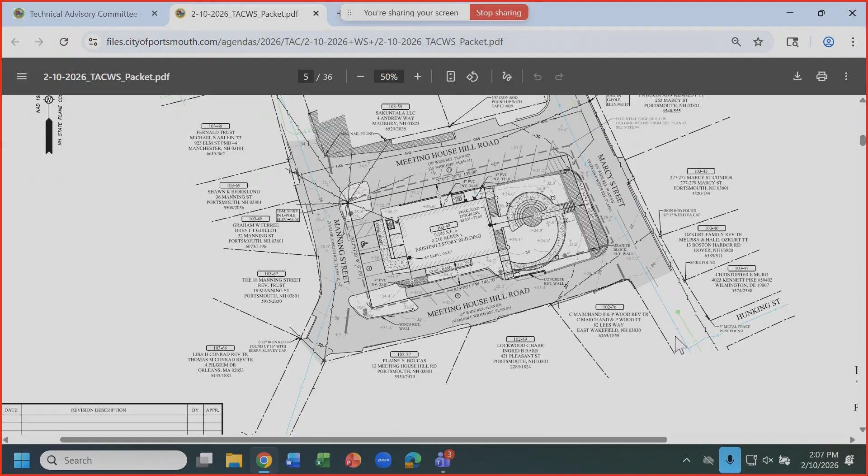So you can go to the site plan now. We are proposing really very little site modification to it. The front part of the parcel is gonna stay essentially the same. There's some settling that's gone on in that spiral area and the handrail and so forth that we're gonna need to do some repairs in those areas.

But it's gonna essentially look the same as it is. On the back side, there's an existing large concrete ramp, and the handicap parking is on, I'll call it, the north side of the site. What we're proposing to do is swap that to the south side and create a new ramp walkway along the south side of the building so that you could enter in the front as an accessible route. On the plan that I have there, I have it going up to a midpoint where there's an existing door, and then going back down and then up to the front entrance.

And that was our initial thought. Tracy, who will speak later, has decided to eliminate that southerly door, that southerly entrance. So it's just gonna be a ramp all the way along the south side and then up into the front of the building, so they'll be accessible to the main entrance going into the site.

South of that, there's gonna be a couple rebuilding the steps and access down to Meeting House Hill Road. On the north side, there's a little piece of walkway that we want to replace that just deteriorated.

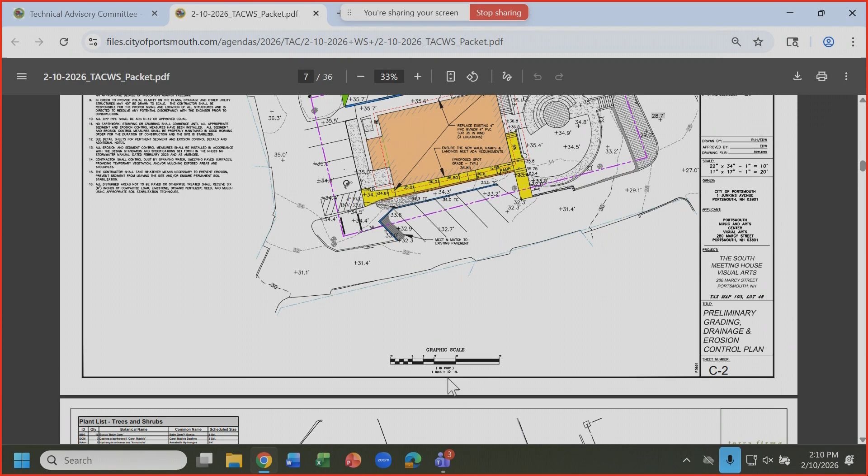There's going to be a new retaining wall along that walkway adjacent to the building on the south side. From a landscape standpoint, there's my grading plan that just shows spot grades on how we have to grade that ramp area. Primarily, that's the only changes to the grading and the expansion of the parking.

And go to the last, is Terra Firma's landscape plan. So he has shown the bike racks, some supplemental parking, landscaping adjacent to the bike racks because on the south of the bike racks is a retaining wall, and so we want to create a landscape buffer as fall protection adjacent to the bike rack.

In front, he's gonna do some parking enhancement, and I am stuck on parking. Landscape enhancements, and then in the front, on the southeast corner, it's a fairly steep area, and the goal is to eliminate some of the lawn in that area and create it more of a natural vegetated area. And I think that's about it. We're looking for your guidance, input, and assistance on what our next steps will be.

Oh, and Tracy, sorry. Sure.

We are looking at the front entrance. There's a wooden deck that connects the spiral to the front door. Part of it has a little bit of a ramp. We'd like to level that out to make it handicapped accessible.

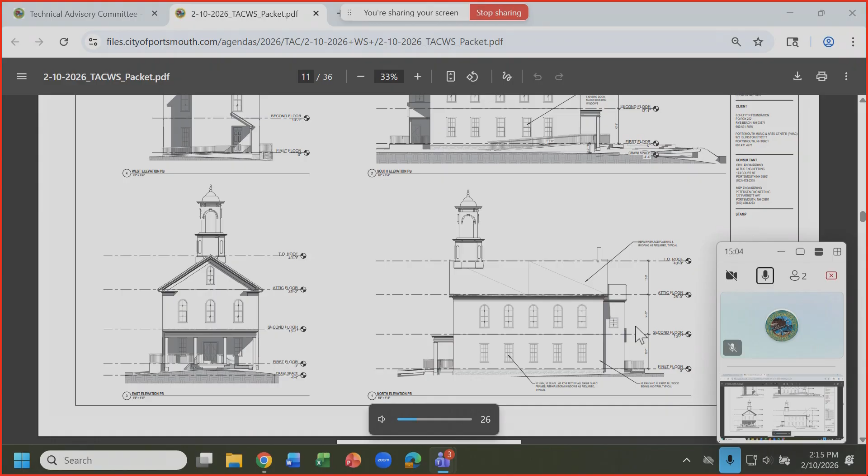Other than that, there are no changes to the exterior, other than a lot of extensive maintenance - repairing all the rotted wood and trim, repainting. The building envelope will be weather sealed. We will repair and reglaze windows as needed. Add more insulation in the attic where it's missing.

We're looking to put utility rooms in the basement, and there may be a little bit of limited excavation required. Adding an elevator to make it handicapped accessible. Fire protection is already there, but that would be updated for the new layout.

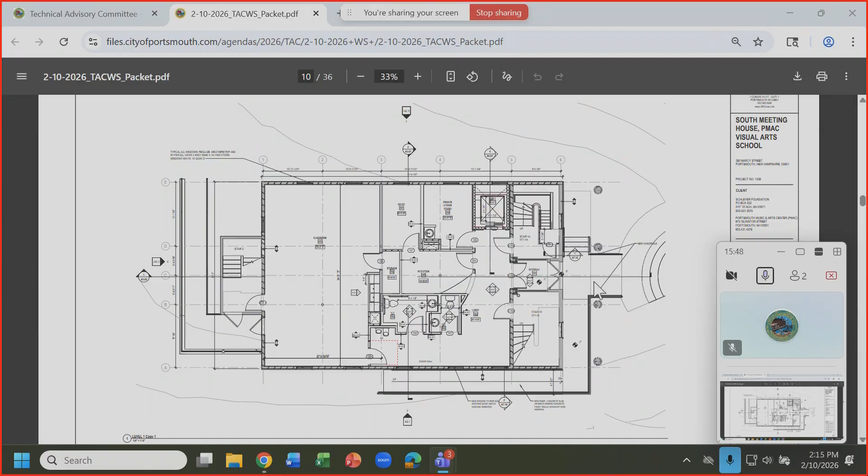What takes place on the second floor? Two classrooms and a small gallery. You don't show that on here though, right? There's no second floor shown - I didn't include the second floor for the TAC work session. You said it is sprinklered, the whole building? Yes. Hold it, you just mentioned an elevator.

How are you going to power that? There's overhead power coming to the site. There are secondaries up there, no big three-phase primary that you would need for an elevator. Peterson is getting on board to be working on this. It is a Lula lift, not a full elevator, so that will help a little bit.

We don't want to bring three-phase power through the south end, that would not be good. No, it's a Lula, it'll be 240, 30 amp, 240.

We're presuming that the pads will need to be replaced, and condenser and so forth as well. Yeah, it's just limited power up there.

The door is just being removed, and the windows basically matching the windows that are there - that's our hope, if you can find them.

There's limited space for putting snow around that building, so you just want to keep that in mind when you're developing your landscape, so that your landscape doesn't get destroyed - crushable, yeah.

I'm not sure I totally agree with creating that green space on the plan to the north there. Seems like a lot, especially considering how tiny those parking spaces are. They're going to be very hard to get into, but for compact car parking, where I did this, I'm fine if we just restripe it.

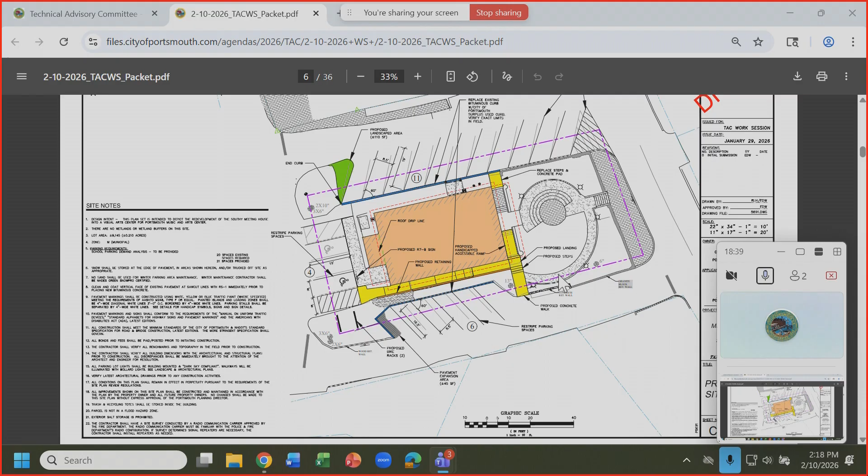So I have no issue, and that's why we're here, to leave those spaces in the same length, same configuration, restripe it. I would still want to add the space on the south side. It makes my life easier to take proposed parking off and just show existing restripe as shown. That site is very, very, very tiny.

There's no room for anything.

Eric, do you have thoughts? Yeah, I was wondering if you can show the width of the street behind the parking spaces. That would be helpful to know, because that is a two-way street there, but what is the width between the end of the parking space and the other side?

Likewise on the north side as well. We've had issues with parking out there where they're backing out of those last spots onto Marcy Street. It's really a blind corner, so they can't see what's coming behind the building. Is any thought given to angling the other way, or making it 90 degrees?

But I don't know what you have for overall width out there and what's possible. Hadn't considered changing the direction. I'd be hesitant to change the direction, because certainly on the south side, that's the way the pavement is configured. On the north side, I don't know. I just feel like we're approaching from Marcy, and so I think it's an easier maneuver to get into the site. Yeah, I know most traffic's coming in off of Marcy Street, so it makes sense to be angled that way.

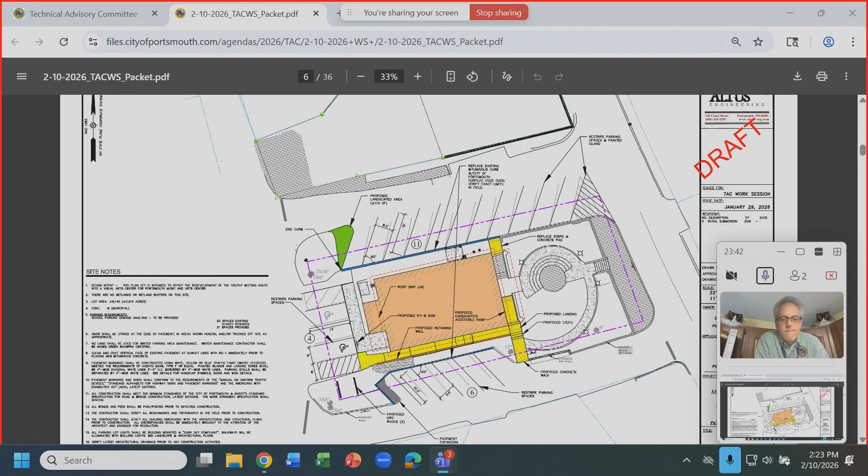So you're meeting the required parking, but you don't know how much parking you'll actually need, right? That's correct, we haven't completed the parking demand analysis. Will it be required? I mean, it was the Children's Museum. Where will people be dropped off if they're not parking? Typically, when people drop off at our institution, they park their car, walk their student into the building, and then go out and retrieve their car. We don't usually have a system for drop-off lanes or anything like that. Yeah, drop off or something like that. So we're not anticipating something like that. Yeah, we're not planning for that.

I do want to comment on drainage. So there's no closed drainage in the area. The building's guttered, and there's existing PVC that discharges between the curb onto the pavement. What we're proposing to do when we replace the curb is to rebuild that in the same manner. There's just no opportunity to do closed drainage connecting to who-knows-where on Marcy Street.

And that landscaped area can't be used for a little bit of infiltration? The one up on top, I was thinking in front. In front? I think it'd be difficult to get the water there, and I'd be concerned with it breaking out and flooding over.

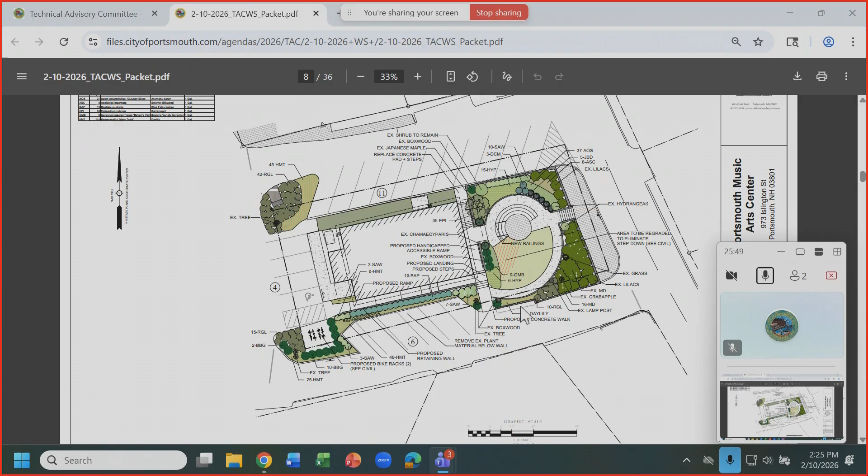So we're looking for your feedback. Next steps. Yeah, it's a nice historic site. I appreciate you keeping it intact. We're excited about it.

Anything else? No. So what do you know, what do we do now? I'm begging. So you're gonna go to the HDC for this next, I think. But what other permitting, do we go back for TAC formal and planning board? You don't have to go to planning board. I think unless something changes at the HDC, I don't know that you need to come back.

Unless anybody wants to see, I mean, you're gonna keep the parking as is, right? Yeah, I think that's more or less the same, just an upgrade of the site that's there.

Yeah, or facelift. And the curbing process, I did have a conversation a while ago with Dave, and so that's an appeal to the council to use that curb, Dave?

Yeah, request for city property. Even though it's city property, using city property? Yep. Okay, I think so, well, we can double check, but put a request in and we'll process it accordingly. And that goes to the council or to you? You can send it to me or the city manager. Okay.

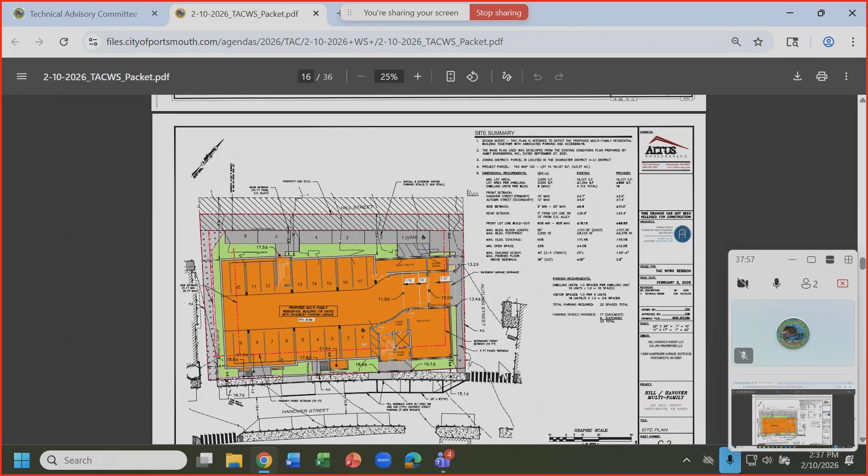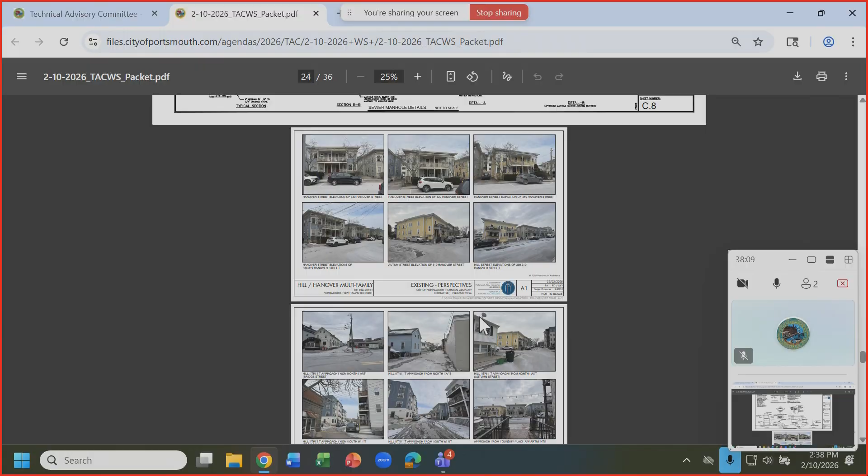Mark, do you want to talk? Discuss if you want to go to the architecturals, I think. I put it away at the end, sorry. That's all right, that's good. So you changed your name?

So just real quickly, we can go through the design and massing of the building. As Corey mentioned, it is 3 stories. We're trying to keep it more residential scale so it fits in the context of the neighborhood. We're also giving it 3 different facades and stepping them, as well as stepping the roof height back and forth along the footprint and face of the facades, so it has the context of a smaller neighborhood and residential design.

The basement layout has 17 parking spots for vehicles, including 1 handicap spot. There are 2 stair towers, with the one along Hanover Street being the main pedestrian entrance. You enter at a landing, mid-level height, which gives you elevator access and stairs. Within the parking garage, you have 2 access points, either the 2 stair towers or the elevator.

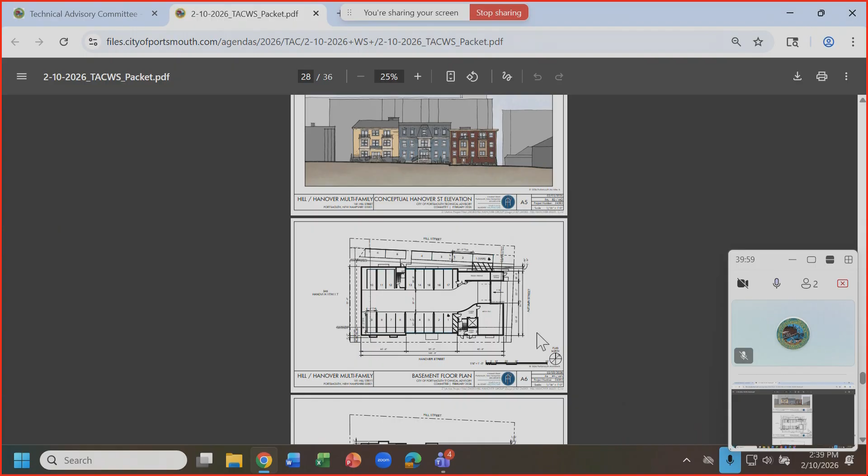We're also providing a fair amount of space for utilities in there, utilities and trash. We can bring our entrances in for gas and electric. We haven't figured out exactly what trash remediation would be, but assuming for this size building it would be private pickup, with totes or wheeled trash barrels. But we have it just inside the parking garage ramp, so it can be brought out to a truck or vehicle on trash day.

Moving to the next 3 floors, these are all the residential living spaces. Right now the layout of the units are all very similar. They range from about 990 square feet to 1,500 square foot units, and they'll obviously be a combination of 1, 2, and 3 bedroom units once we get further along in the design.

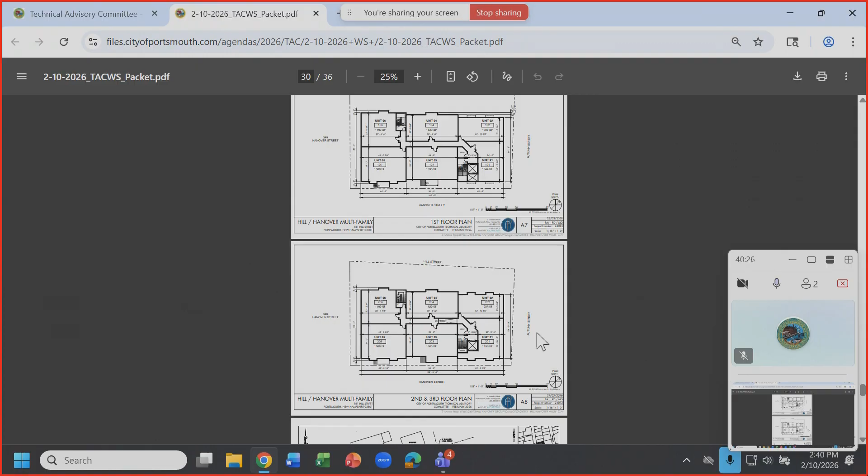That's not our project. I don't know, did you get that extra? Okay, thank you.

So we had the conceptual rendering, which just showed the elevations from Hanover Street. Since we've submitted this packet, we've developed the building further so that you could see all sides.

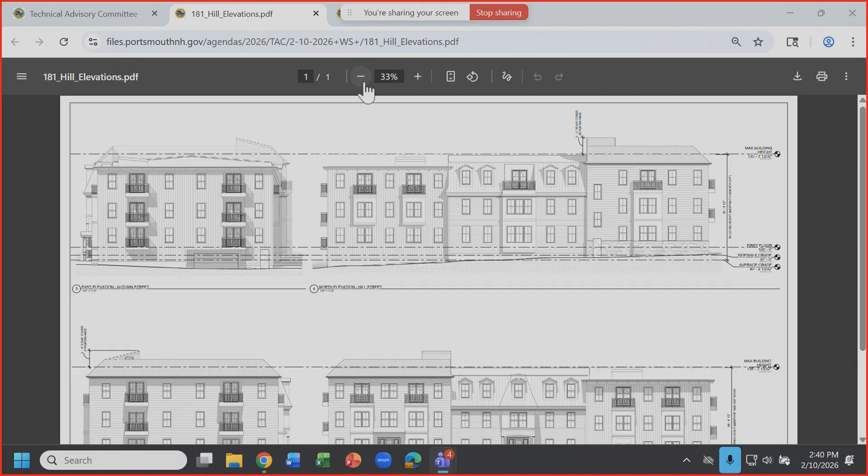Up on the upper left hand there, you'll see that's the Autumn Street elevation. At the ground level there, we've worked out the grades so that we can have the entry to the parking garage.

There are balconettes on basically all sides of the building. On Hanover Street itself, as we talked about when we were looking at the floor plan, the pedestrian entrance is on the bottom right of the building there. There are 2 porches. Those are really only providing access to 2 single units, so those units would have direct access from the street.

Building types at this point, we're looking at a podium type construction, type 2B for the parking garage, and then probably type 5 construction above. Obviously, it would be fully sprinklered and fire alarmed, all that fun stuff.

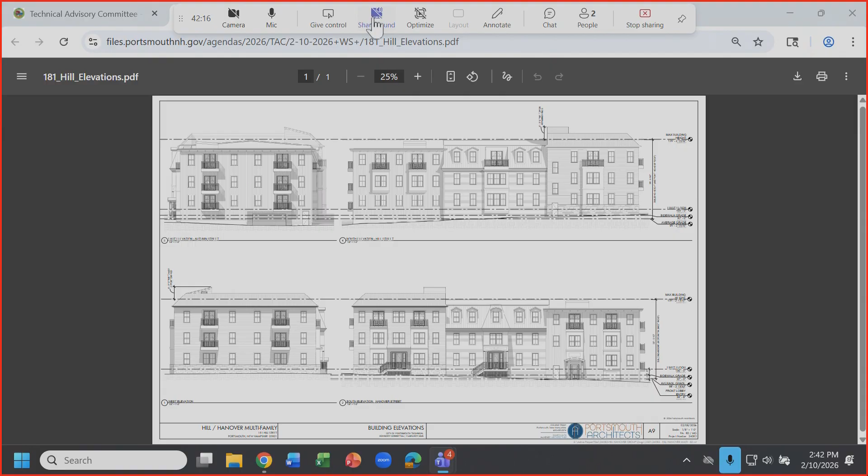What other items do we want to hit on? I think the primary other items are utility relocations. There's a new 8-inch main that's going down Autumn. I think the intent would be to connect to that. The buildings would have fire suppression, so running those separate connections from there, typical with what we've done in the city on other projects.

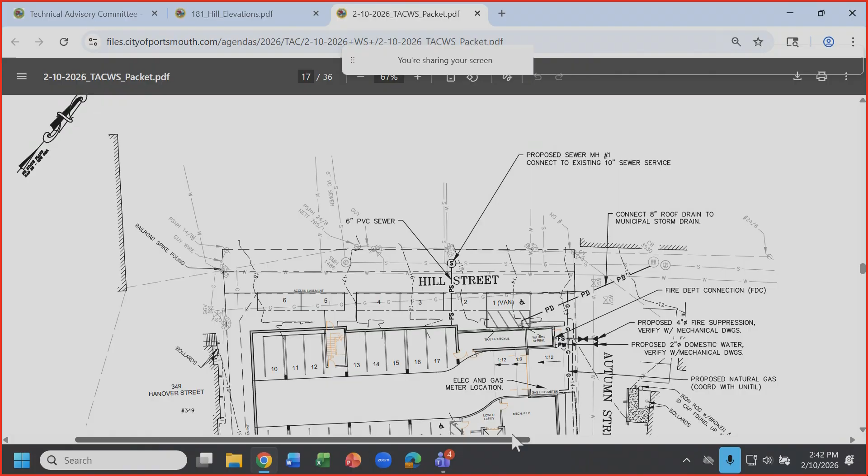Sewer line is along Hill Street. There's a manhole close to the intersection of Hill and Autumn that, I guess, some of these items we can talk through a bit more after, with potential site plan review application.

I understand that based on the as-built plans we just got, there's a line that's coming from, that runs right behind the project, kind of bypasses the existing manhole and ties in after it. So where exactly we connect, we could discuss that with the city for our public sewer connection.

The public sewer stops at the manhole near Autumn Street, correct. So that's private sewer above that, so you wouldn't want to tie into the private line. No, what I was saying is the private line goes past it. From my understanding, we would go past that connection and tie into the public sewer after the connection that bypasses that manhole from the other line running behind the property.

I'm guessing, obviously, the Hill Street label that's on the plan is wrong, right? Because that's not Hill Street up there. Correct, that should be modified. Hill Street ends at Autumn Street.

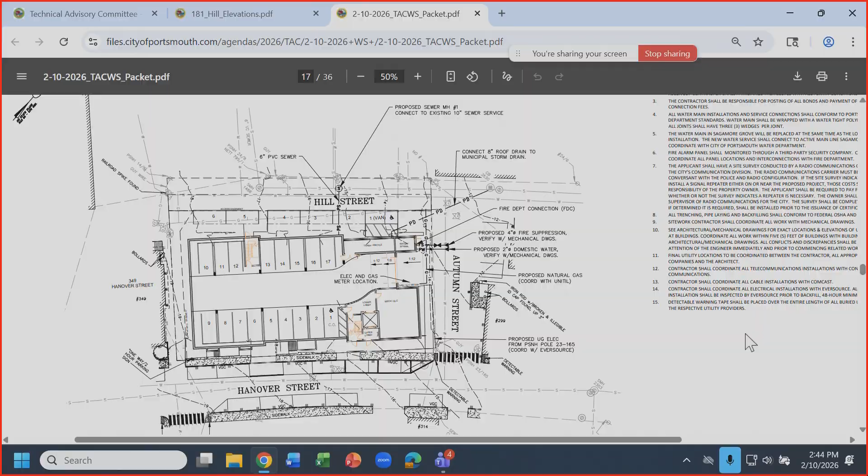Let me give you a couple of hints as you move through the as-builts and the utility design. There's electric primary underneath that concrete sidewalk in front of the building that Eversource put in, on Hanover Street. That is going to be your power supply. You're going to need to put an electrical vault in underneath that sidewalk so that you can access the primary, and you're going to need a pad mount transformer somewhere on that site, big enough to feed that building.

I just had a meeting with Eversource 3 weeks ago about another site that's nearby, and there's no other way to get power to anything up there. They're at their limitation because of the number of poles and the number of services. So you're going to need to drop a vault on that primary electric line and then put a transformer somewhere that makes sense off of that vault.

Also on Hanover Street, brand new sewer and water services were provided for all those buildings. So you're going to need to terminate all those brand new connections at the main. It's going to require digging up Hanover Street quite a bit, so we're going to make you mill and pave Hanover Street after you're done.

Drainage connection is on Hanover Street now in front of the building. The one that was in the back was connected to the sewer, it's gone. So that'll be your connection for the roof drain. There's a catch basin near the corner of Hanover and Autumn Street, and that is the only spot where there is stormwater available up there. So that catch basin that was out back was tied into the sewer, and it's been removed.

The 3 buildings that were up there all had new electrical services installed. They come across from the poles across the street, those will all have to be removed. I don't think the gas is going to be a problem, that's probably the easiest thing.

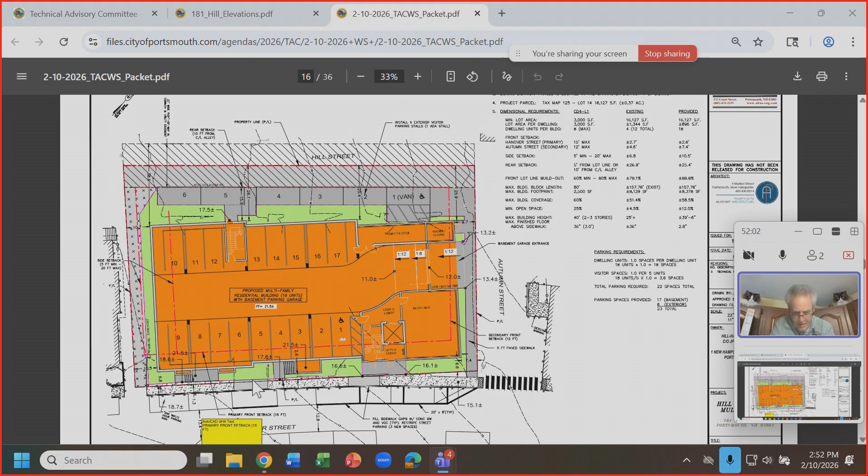And then along Hanover Street, it looks like you're able to fill in the existing driveways to get 3 new parking spaces? Probably 2, because of the hydrant we're gonna have to provide access. But yeah, 2 additional parking spaces on Hanover Street as well, correct?

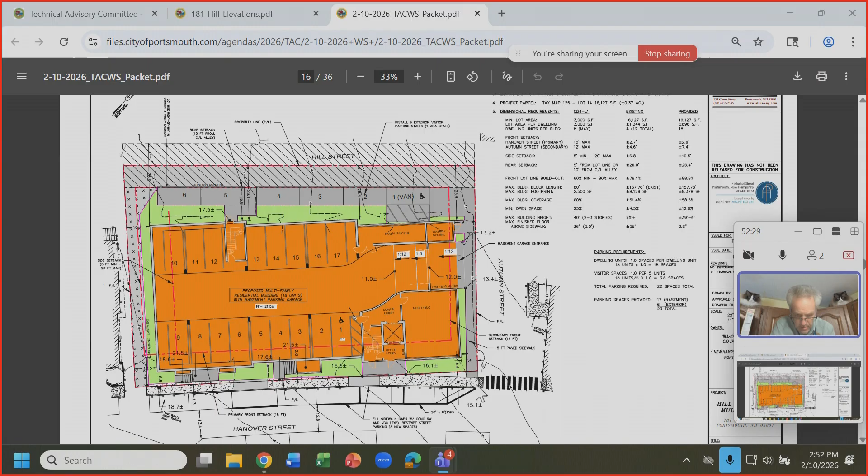Are you extending the sidewalk there at the corner of Autumn Street? Is that how you're able to move that angled line further towards Autumn Street? That one right there? The crosswalk - it was going a little bit closer towards Autumn Street, correct?

We were trying to get a 3rd parking stall in there, but do you know what the total width of walkout we would need where the hydrant is? Whatever Eric allows, or there's a state law, but there's also parking rules, so whatever they want is acceptable. The hydrant needs to be centered - it's a brand new hydrant on a brand new main. I'm staying out of it.

It's gotta stay there and accessible, that's all. But how much space in front of it do you want? Is it 12 feet, is it 15? I believe chapter 7 of our ordinance requires 15 feet on either side, but double check that in chapter 7, that's where it would tell you. 30 feet clear.

Well, 1 parking space being added on Hanover Street.

It looks like you're also losing 3 spaces on Autumn Street, 3 parallel spaces that are there today. Since we're shoveling it out. I believe those spaces are currently - I understand. I'm okay if you provide the private spaces.

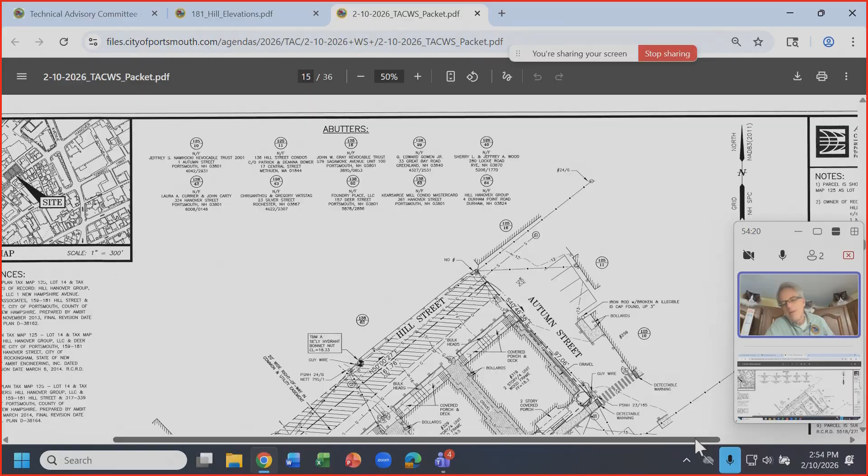There's a sign on the side that says private. Yeah, but I don't know if that sign is a legal sign. It appears that they're parking in the right of way. Those spaces are in the right of way, not on the site. Quite possibly here, they're off the lot line.

Not sure why the sign's on the building saying permit parking only. If you can show that you have rights to those, then that'd be fine. Otherwise, that's a removal of on-street spaces that would have to be approved by PTS and city council.

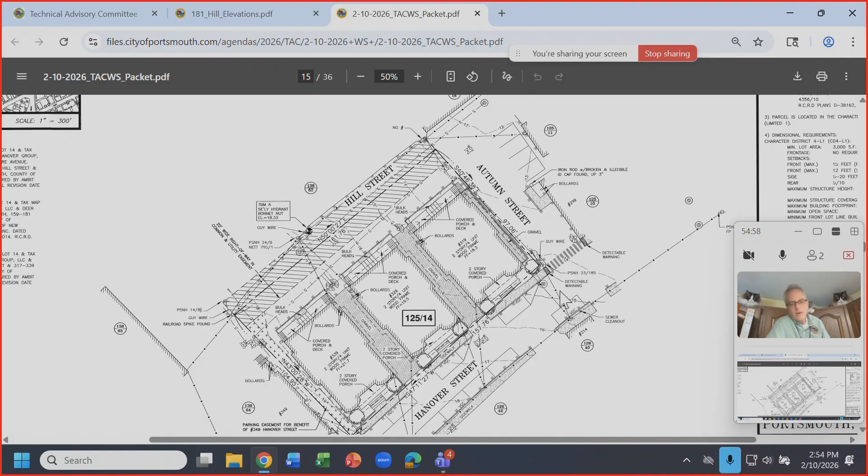Here, it's private spaces - they've been marked private for 40 years. Yeah, we can discuss it. I don't know if they've ever been public spaces, but we could talk and figure that out if that is in the equation.

Any other comments or questions? Are you all set, Corey? I'm all set right now, yep. All right, thank you.

Thank you. Next item is 361 Miller Avenue.

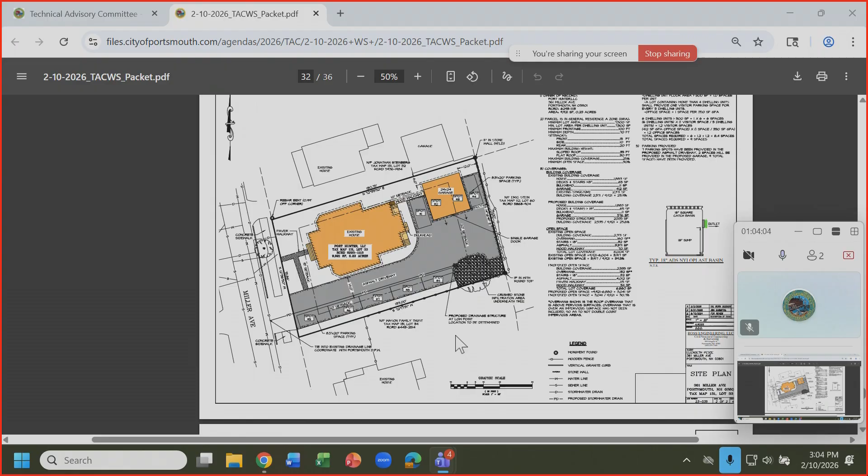We wanted to tuck it in, and the neighbors are actually all in favor of moving the garage to this location, because it's going to make for a better sightline for everyone, like the Epsteins who are behind us - now they're looking at that dilapidated garage. For the Steinbergs on the other side, they suggested we put the garage next to theirs so they wouldn't see it and everyone could see the tree. So that's where we started, but it's also that my husband and I need office space. I was renting office space, but unfortunately my office got sold, so everything is in my house right now, and it's really a challenge.

And then it looks like your open space - was that something you went to the ZBA for? We did go to the ZBA for building coverage. Open space is per conforming. Oh, you're conforming - sorry, yep, 30.7, just.

So I guess by the regulations, if it is an office, would we have to go back to the ZBA to request a variance, or what? That's what our regulations say, yep. But it was in the original application. Can you pull up the ZBA application just to see if it was already asked for? It wasn't a request to the ZBA - there were no plans submitted showing this in the original. It wasn't just the plan, we definitely talked about it with the ZBA. Was there anything documented? I think this really just shows storage, preliminary plans. No, this has never been something we added last minute.

But it would have had to be a variance that they granted, requested. Well, what does the variance say that they gave us? The building coverage, and then setbacks for the structure, side and rear. And I guess in the regulations, is there any cutoff - like if it's used as storage and they visit it for two hours a day and use the printer, is that an office? With minimal usage, I think an office... the storage use is totally allowed. If you're going to get files and put files in there, that's just storing files. If you're using it as an office, then it's an office use.